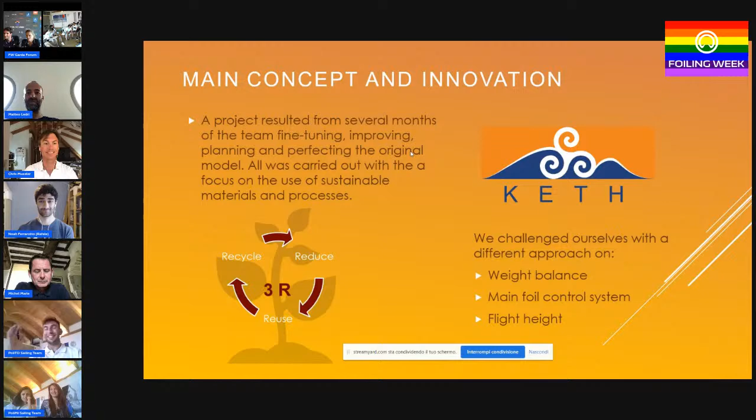We can go on with the slide. So as Domenico said before, the three main points we are focusing on in order to innovate the moth are: first, the weight balance. We want to have a boat as stable as possible, so we have to change the distribution of weight. We decided to put 82% of the weight to the centerboard, so any single variation of forces...

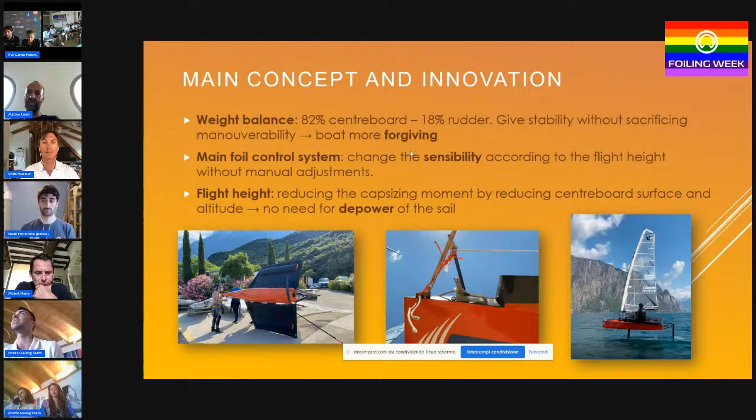The second point is the main foil control system that allows us to change automatically the altitude without any adjustment needed from the sailor. And finally, the fly altitude - we decided to keep it low in order to try to reduce the capsizing moment and have more power in the sail, so the sailor doesn't have the need to depower the sail.

From the flow dynamic and structural point of view, we compared lots of types of profiles, from commercial ones to homemade ones, and we decided on a homemade profile that increased our efficiency. The result is a very thin profile, as Bruno can show all the people here.

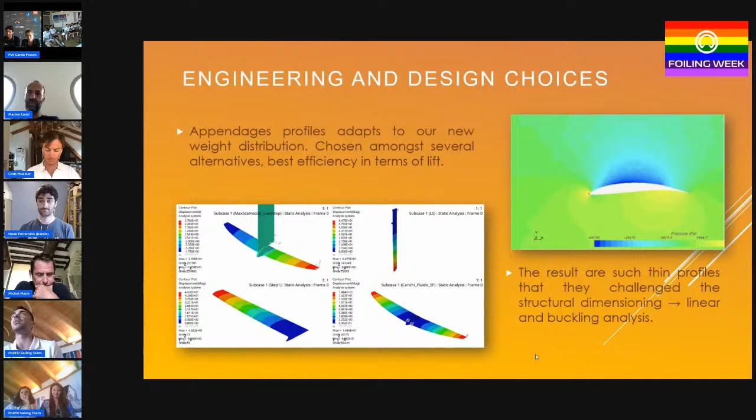As you can see in the slide, the idea is to give a great variation of flap angle during the takeoff phase, while during flying the variation must be lower in order to avoid any disturbances from waves, etc. We obtain this by optimization of a curvilinear guide, and the mechanism is something like you can see in the figure at the bottom.

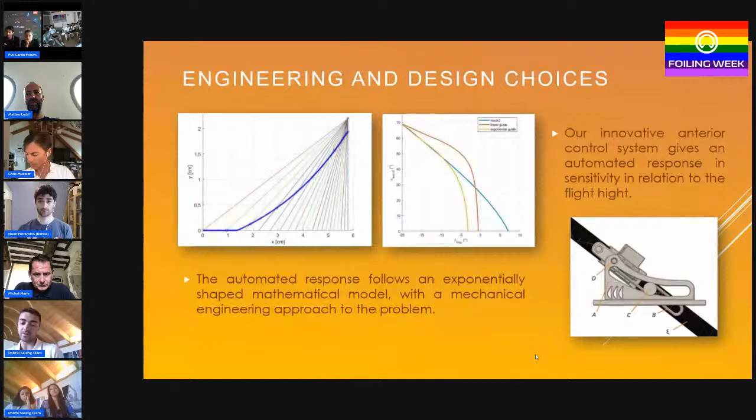For the hulls, we designed a lot of them in Maxsurf. We were looking for something that facilitates a smooth takeoff. Then we chose 3 finalists and passed them to the CFD area, and chose the best one in terms of efficiency.

For the construction process, it's important to say we decided to use balsa core for the deck, because it was just flat surfaces, simple geometries like I said before. But for the hull, we tried to apply PET.

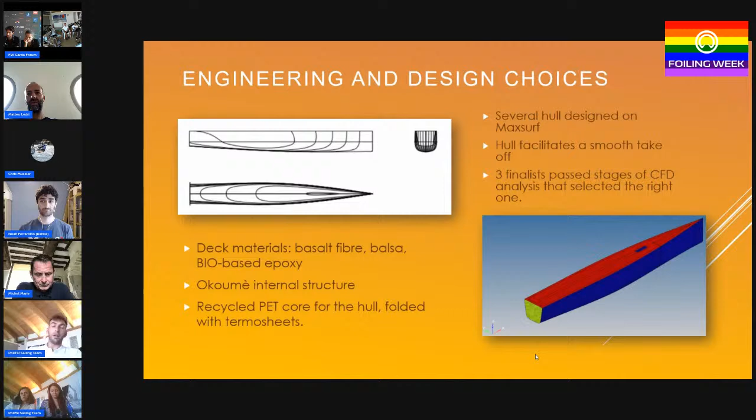Recycled PET, but we tried to minimize energy consumption with the application of thermosheets. The result is quite interesting, because we had to change the lamination process, doing it in 2 steps.

That leads us to the molds. We really focused our efforts on molds because, looking at the SuMoth rules and how the competition is set, we tried to minimize milling time and the waste of raw materials, as well as the use of raw materials.

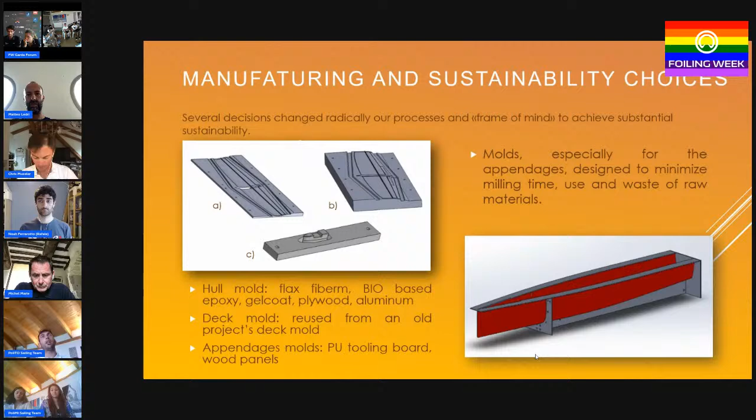In the end, I think it's interesting how we made the tramps and the wings, because we took upcycled broken wing surf masts. It was really challenging to dimension them structurally, because they were all different diameters with no known number of plies or certification. So we had to make a lot of assumptions and take deep measurements, and for now they are still holding. So I think we did a good job. Thanks for your attention.

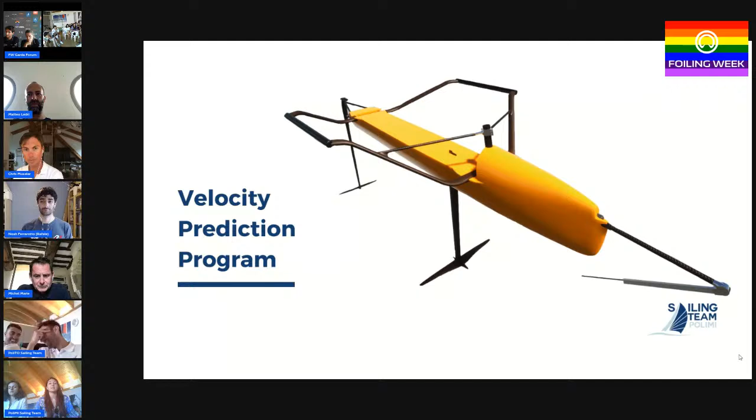And we are from Politecnico di Milano. First of all, to understand the general behavior, we developed a velocity prediction program in 5 degrees of freedom. After that, we dedicated ourselves to researching materials that would make our project as eco-sustainable as possible. Our university has always tried to stand out for innovation and technological development. Following these principles, we decided to realize all the molds with glebanite.

Glebanite is a fully recyclable material, secondary raw, that came from glass fiber. Glass fiber is sinterized and recovered through pyrolysis of glass-reinforced composite materials at the end of life.

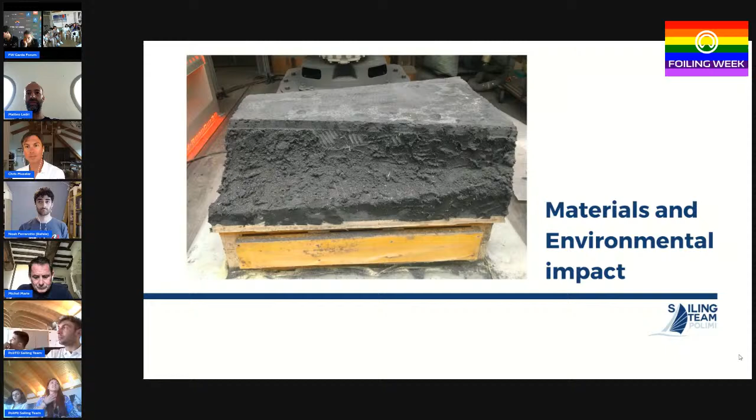The geometry of the hull and the waterline follow those of a model already on the market, adapted to be matched with various shapes of terraces and appendages. The terraces have been extensively studied and modified. Specifically, the transversal part and components have been designed to optimize the boat's aerodynamic performance.

In addition to recycling and reuse, these two components have been designed identical to each other. In fact, this way it was possible to realize both components with the same mold.

We also studied how to adjust recycled and upcycled parts. The longitudinal components came from carbon bowsprits used in the skiffs we used for the 1001 Vela Cup competition. For the trampoline we used old sails that otherwise would be thrown away, giving a second life to materials that would otherwise have been wasted.

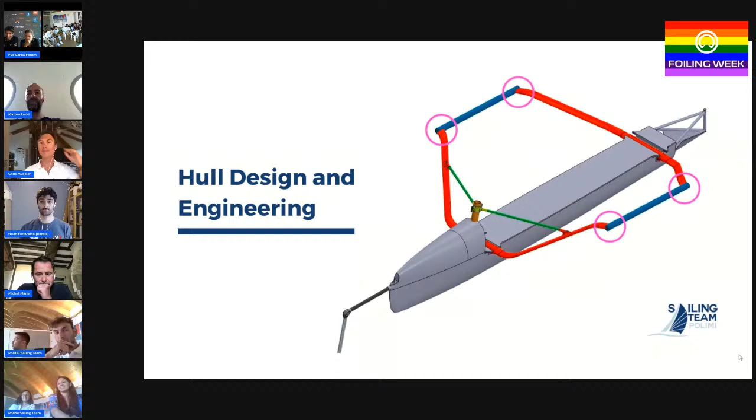Talking about the foils, we focused our attention on the optimization of the keel foil and rudder foil. Our velocity prediction program gave us not only the optimal velocity attitude but also the design and geometrical parameters, such as horizontal areas, appendage distance, and rudder rake.

Given the VPP results, especially the lift coefficient of the foils, an optimizer code was written in order to find the best profile with minimum drag at the target CL. Again using the VPP, we verified that this new profile provided the best performance in most wind conditions.

Later on we proceeded to a 3D analysis using a low-fidelity vortex lattice method. We studied the stability of the boat and determined the plan form of the surfaces, considering minimum induced drag, meaning the lift distribution closest to the elliptic one.

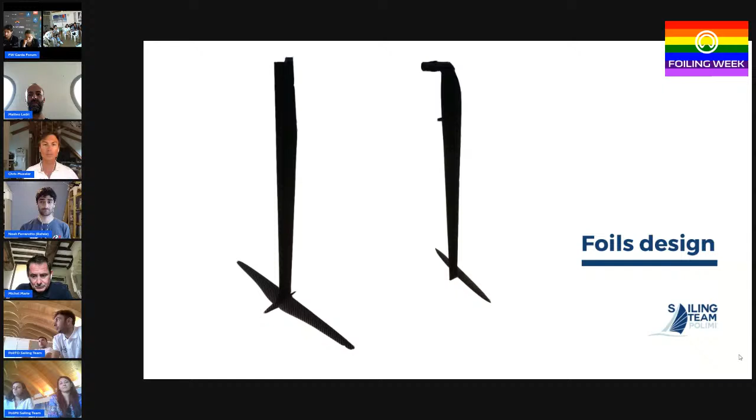One of our strong suits is the sensors. From the very beginning we realized we didn't have enough experimental data to work with, so we asked ourselves if we were able to get them. Our sensor team did a great job implementing and designing an onboard circuit formed by accelerometers, anemometers, gyroscopes, and GPS, all powered by a solar panel, according to our sustainable policy.

This is all included in a box positioned in the gantry. On the boat, the data are shown to the skipper through a display, so the helmsman can see the velocity and wing angles. The other data are collected to be studied in a second step, and we hope this advanced technology will help us upgrade our projects for the future.

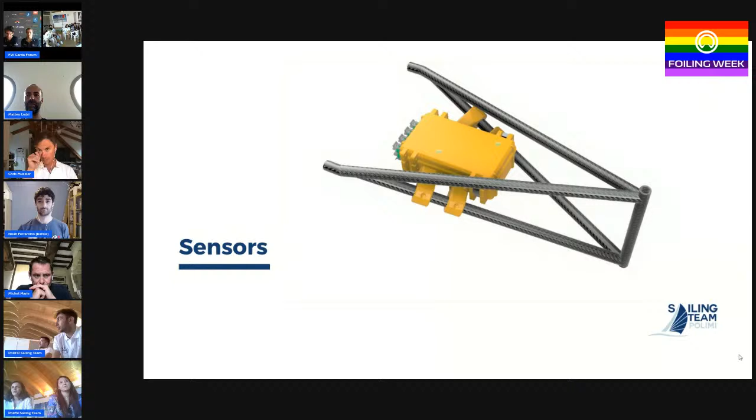Great presentation. So we will move on to Rafale ETS with Noah Ferrarotto, who is awake. It's not too early for you, Noah? Oh, no. So whenever you want—I don't see your screen share yet. Yeah. I don't think we see it. Yeah, good? Yes, awesome. So please go whenever you feel like. All right.

Hello everyone, welcome. My name is Noah, and I'm a member of Rafale out of ETS Engineering School in Montreal, Canada. I'm here to present Rafale 3, our third prototype after two successful C-class catamarans. We're rethinking how we build high-performance dinghies through eco-design, innovative manufacturing, and extensive life cycle analysis. I'm going to show you a bit how we went about it, starting with the hull design.

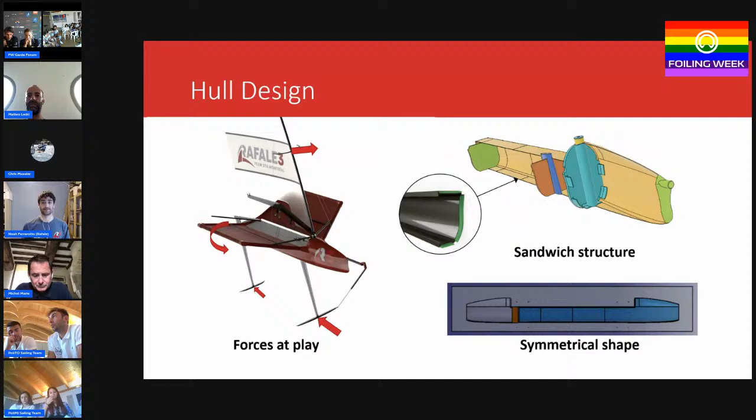We actually made both halves in the same mold. We had a mold with two bows, and we made the transom of each shell using a partition, drastically reducing our tooling costs and associated environmental costs.

Our foils are very much inspired by those of production moths. We have an adjustable gantry system, and our verticals are made of a sandwich structure with a Corecell M60 foam in the center, surrounded by carbon fiber skins.

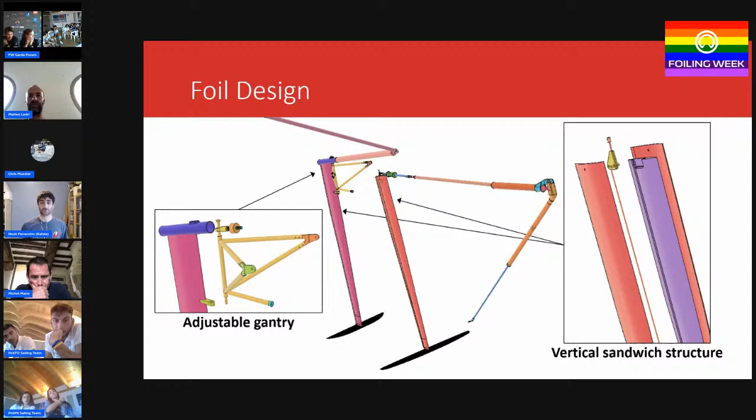We spent a lot of time optimizing the wing, the horizontal sections, which were parameterized in STAR-CCM+ CFD software. That allowed us to determine the optimal shape, angle of attack, wingspan, and flap angles.

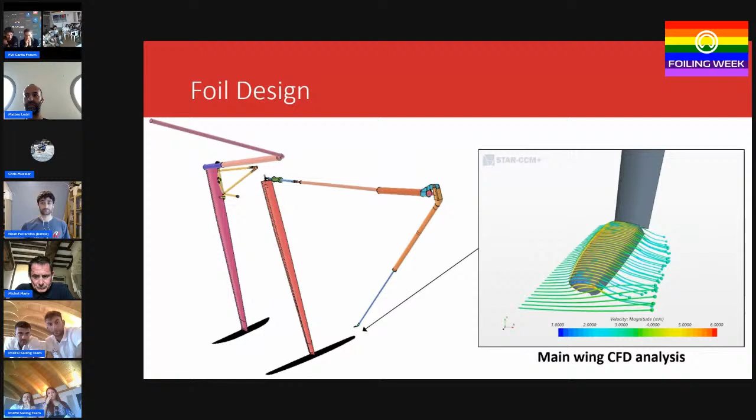So from the results of the CFD, we were able to determine the optimal composite laminate for our stiffness during nominal flight, and that was measured through tip deflection. And then in extreme cases, we measured the strength by analyzing the root stress.

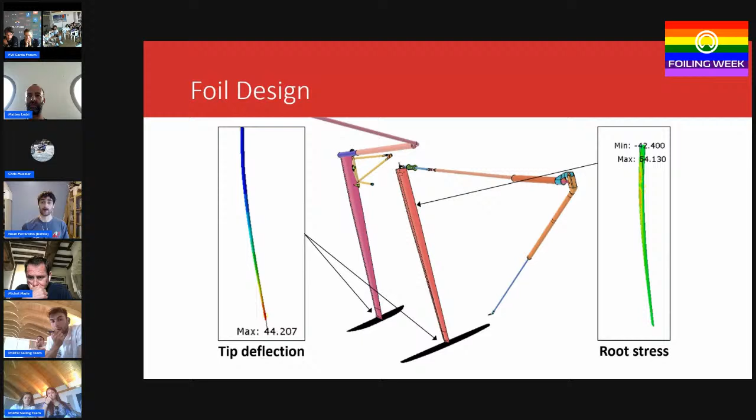So our horizontals, to make them, we had a bunch of pre-preg carbon fiber lying around from previous projects. So we opted to upcycle every material we already had on hand before acquiring new ones. So this leftover pre-preg was laminated into a thick slab and cured in an oven. And this cure cycle was simulated in Raven cure cycle software.

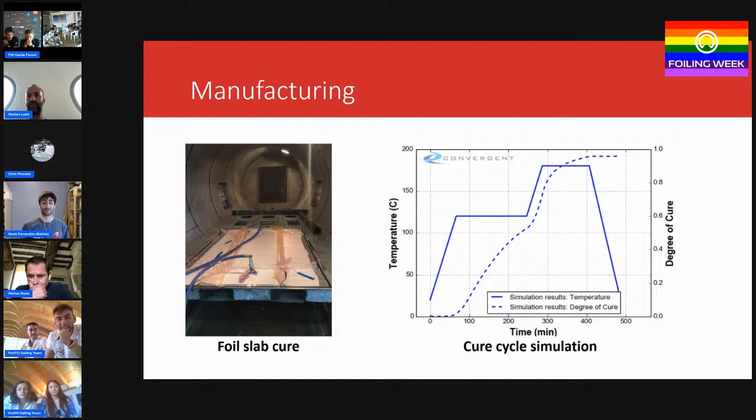So that's a tool that gives us the confidence that we reach the optimal degree of cure for our cure cycle. It's not only a software that can be used for oven cures, it can also be used at room temperature. So it's definitely a tool that we'll keep using despite moving away from pre-pregs in the future due to their high environmental costs. So we will be using them for room temperature cures, such as the infusion of our hull.

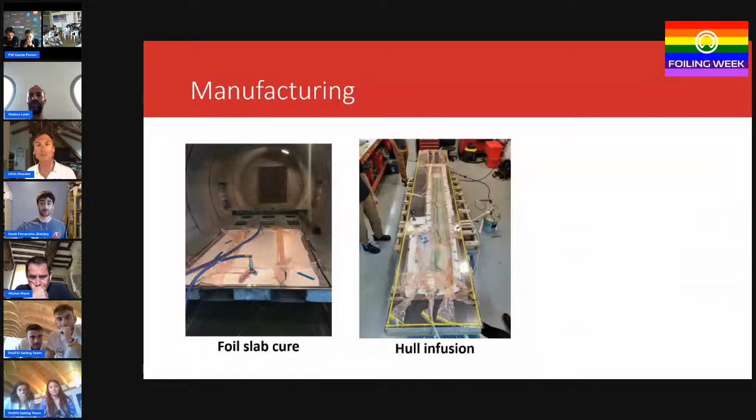And we've also had help from some sponsors, namely Gurit Americas, who helped us machine the cores for our verticals. So every step of the way, we were doing lifecycle analysis to guide our design decisions and manufacturing techniques. That allowed us to validate each and every one of those choices. And once we were happy with our design, we were then able to compare with other production foilers and see where we lived up to our claim of being sustainable.

So we can see that we're doing pretty well compared to the Ikual and Mach 2 moths, namely due to our basalt fiber hull as opposed to a carbon fiber one. But we're not yet on the level of the WASZP because our foils are still carbon as opposed to aluminum. So the main lessons we drew from this were, number one, avoid prepregs, and two, explore more bio-based composites and try to find a better material to make our foils out of.

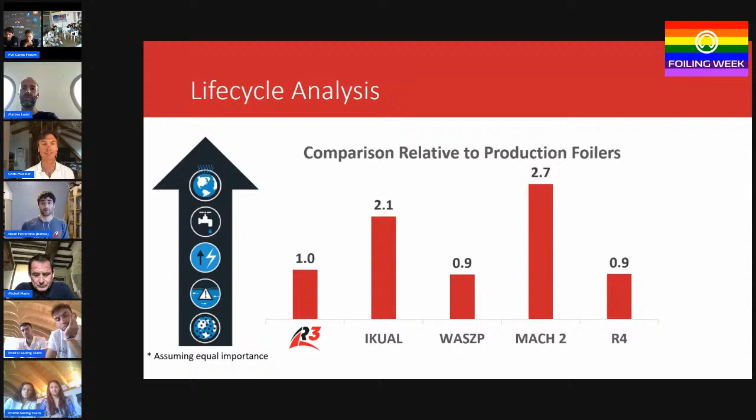And so with this in mind, we conducted a preliminary analysis for a future prototype, Rafale 4, and that will be used in the future to guide our decisions. However, right now, we are very much focused on the present. We're making progress every day towards the completion of our prototype. So we have a cured wing slab that's ready for machining into our wings.

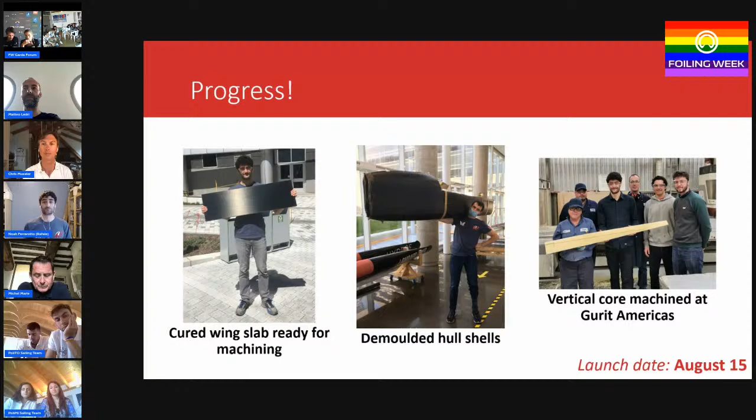We have 2 hull shells that have been infused and demolded and now are ready to glue together to make our hull. And we have our verticals that have our core, and also our skins have already been laminated. So we're making good progress towards the completion of our prototype. And so we look forward to foil with you at next year's foiling week in 2022.

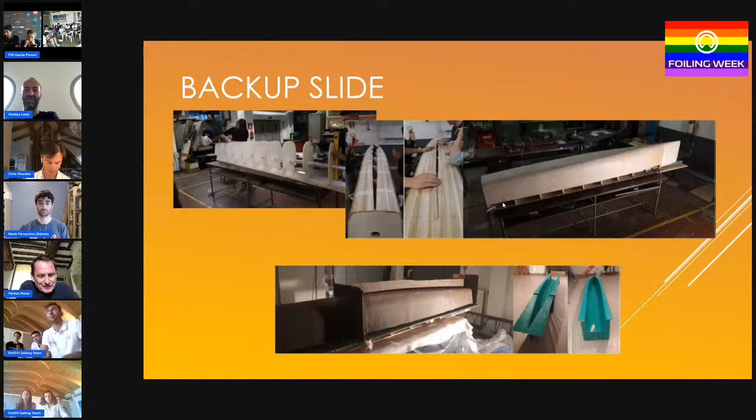Okay, we continue with the. Just remove the screen. I would say Adriano, right to my right. Thank you. Hello, everyone. I would like to ask a specific question to each team, if that's okay, Bruno. Yes, please. Okay.

So I would start with Torino, the first presenters. You said that you started your design process with a what-if question, and I would like to know, in terms of voice of customer, if you had the opportunity to discuss with some moth sailors and validate your assumptions: flying lower is good, having a completely automatic adjustment is good. Those were your assumptions, but then they also became reality, meaning they have been tested somehow, right? How did you do that testing?

You are right, because these are assumptions, these are hypotheses, but we want to innovate something, to change something. We started by studying the Mach 2 as a reference, and then we asked ourselves to push over the limit. And personally, with another guy, this is a mechanical one. I have an aerospace background, so we

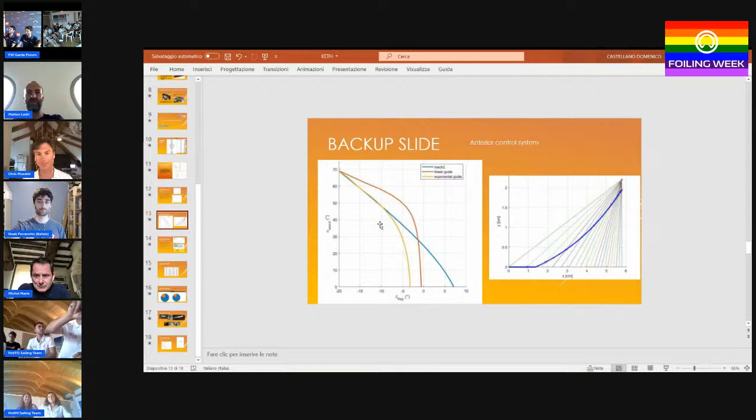Milano, are you ready? Yeah. Absolutely. Okay, so

In your report, you often try to source material locally to reduce transport cost. Have you considered the cost of transporting the boat around the world to participate in races and similar events? At the moment we don't have a boat, so we are trying to realize that.

But usually we train on the lake that is very close to our university, and it's not a big deal to reach the lake. And to reach Malcesine, we used more or less 3 hours, and that's all. We don't have any other CO2 emission or other things.

I think it's very beautiful that you have tried to design a front and a rear wing bar that are using the same shape. And that is amazing because you reduce the stock. But as soon as you have to move that boat, having a joined right and left wing bar, it's going to create significant CO2 emission for transportation eventually. So that's also something to be accounted for.

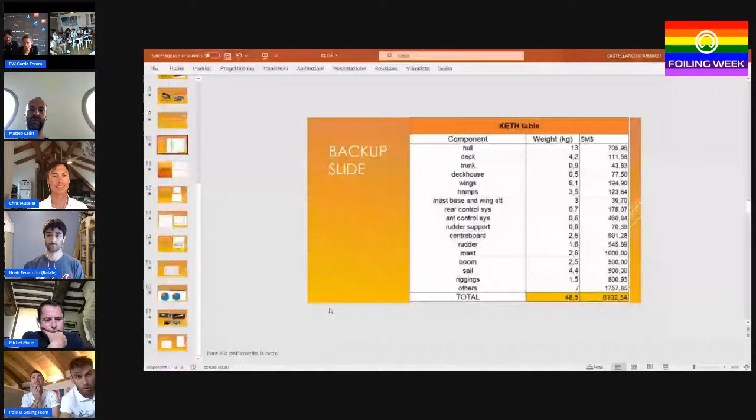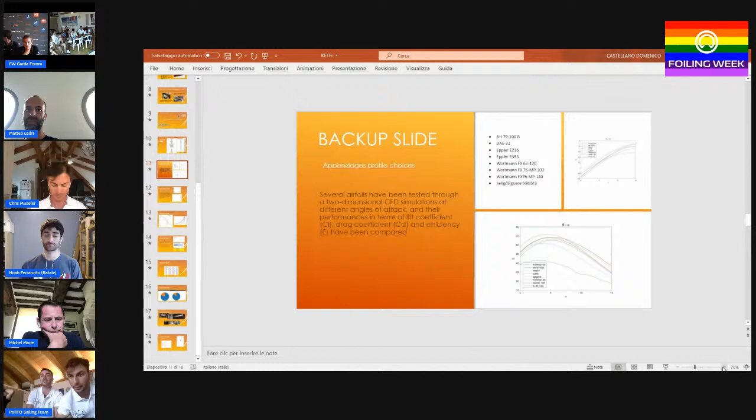Okay. So in terms of CFD simulation, like you said, we trust in our results, but we verify them. The main goal is not only to develop an efficient profile, which is not easy but possible with CFD analysis, but also to develop a profile that is functional with our architecture and our concept of the boat. So first of all, we did the analysis every time. For example, we develop a new profile, we test it with the VPP, in order to verify if it is good in terms of stability in our case or not.

And at the end, we developed a homemade profile, for example for the main foil and also for the vertical part of the appendages. Those are probably easier to develop because the profile has to be symmetrical. The great challenge this year for the moth is the simulation of the flap, or rather the decision of the flap and the maximum variation of the flap. This was the most challenging part in CFD simulation. Yeah, Rafale?

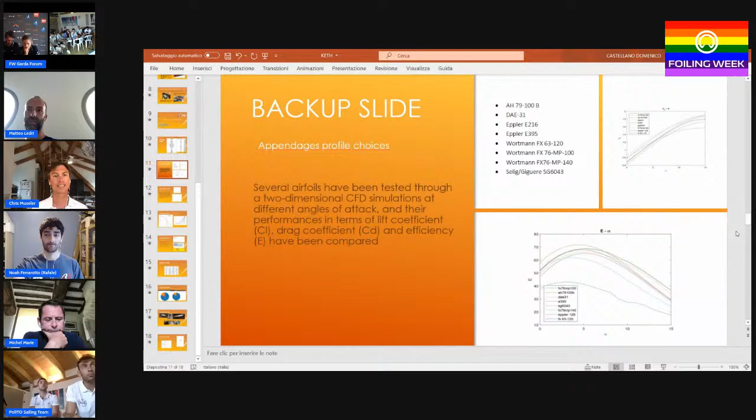Yeah. So similarly to our physical testing, our CFD was very much a ground-up process. We started with 2D hand calculations and then moved up to CFD with finer and finer meshes. We started with a very conservative turbulence model with a coarser mesh to determine the general design space. Then we used a parametric study to iterate through many configurations, starting with angle of attack and moving on to span to hit the right lift number, and eventually moved to a very refined mesh with a less conservative turbulence model.